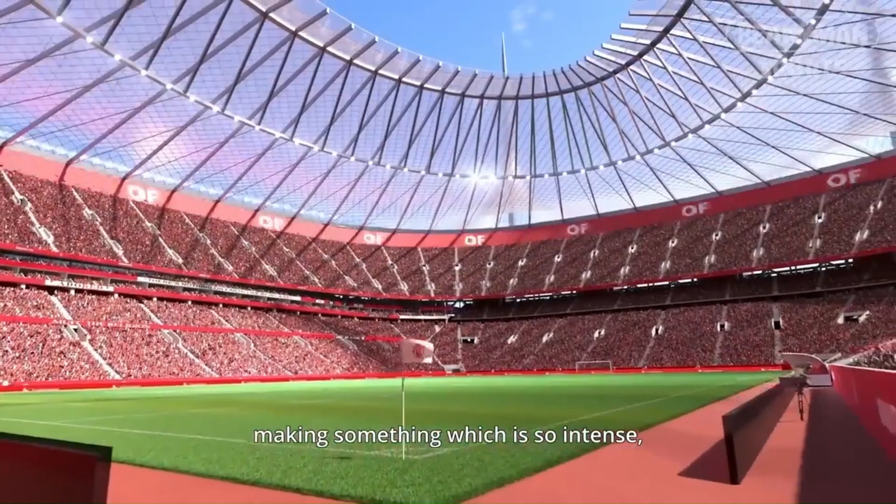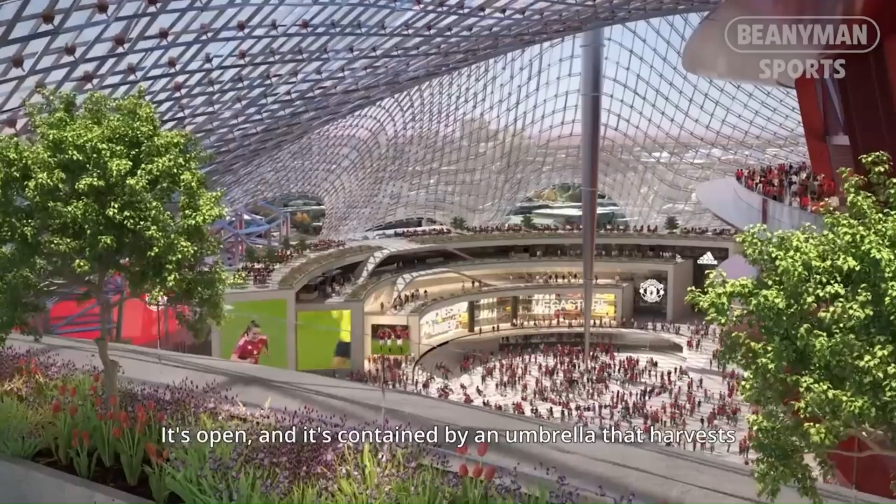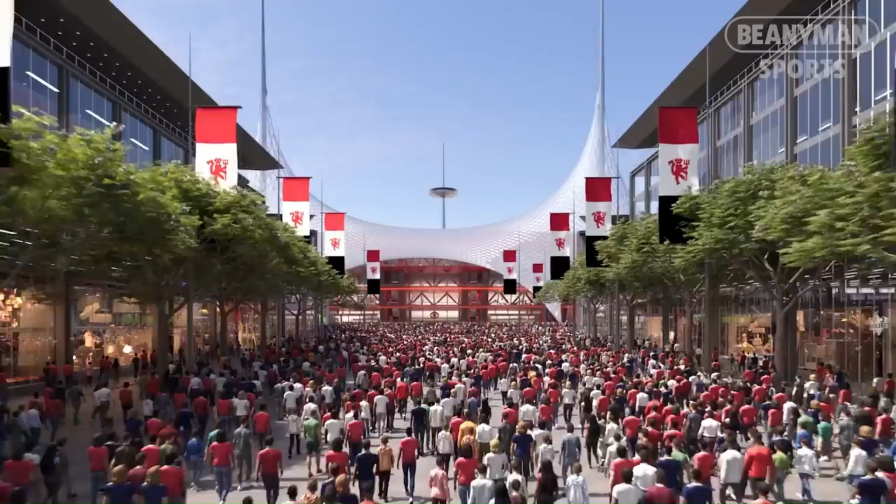This has to be one of the most exciting projects in the world today. It starts with the most famous football club in the world, 1 billion followers globally. So it starts with the fans. And it starts with the idea of making something which is so intense, it brings you close to the pitch. Acoustically, it cultivates the roar. As you move away from the stadium, it's not a fortress surrounded by a sea of cars. It's open, and it's contained by an umbrella that harvests solar energy, harvests rainwater, but is protective, and it encloses arguably the largest public space in the world. It's welcoming, it's open, it's at the very heart of a new neighborhood. And then it's part of the city of Manchester, the fastest growing city in the United Kingdom. A city, again, like no other. It's a powerhouse, steeped in history. Trafford Park was the industrial heartland of the nation, a heritage which I have a personal connection to. My father was a factory worker at Metropolitan Vickers.

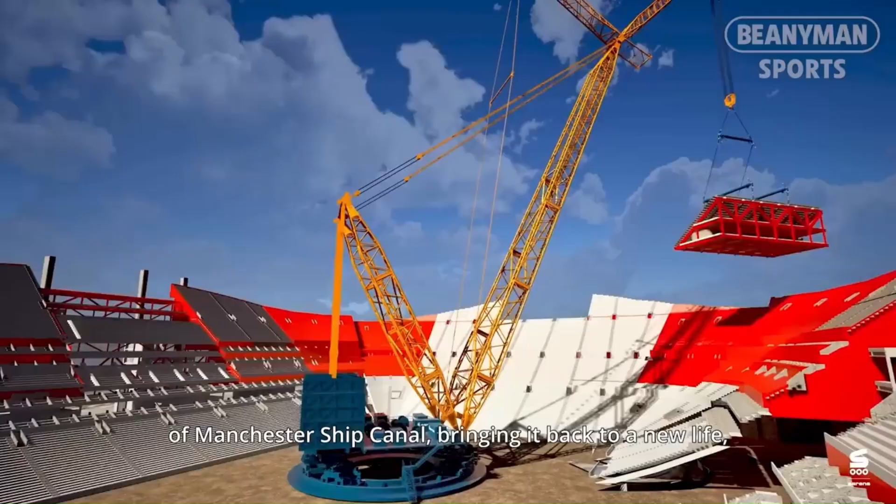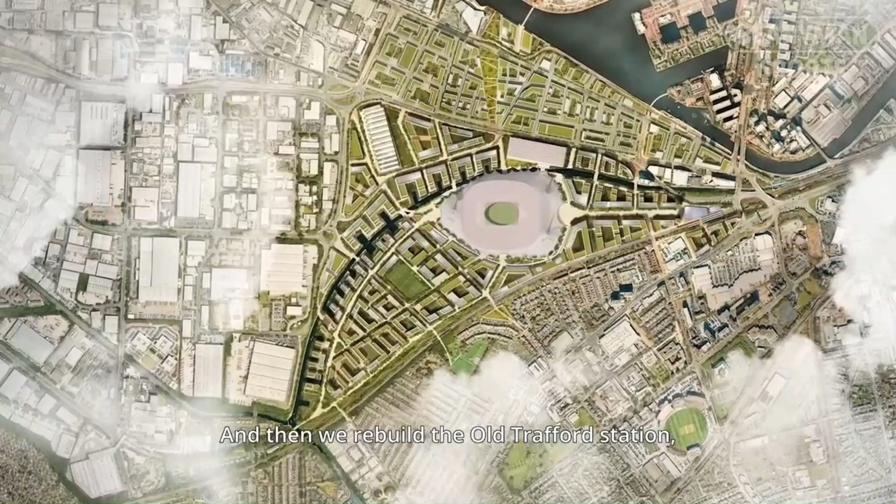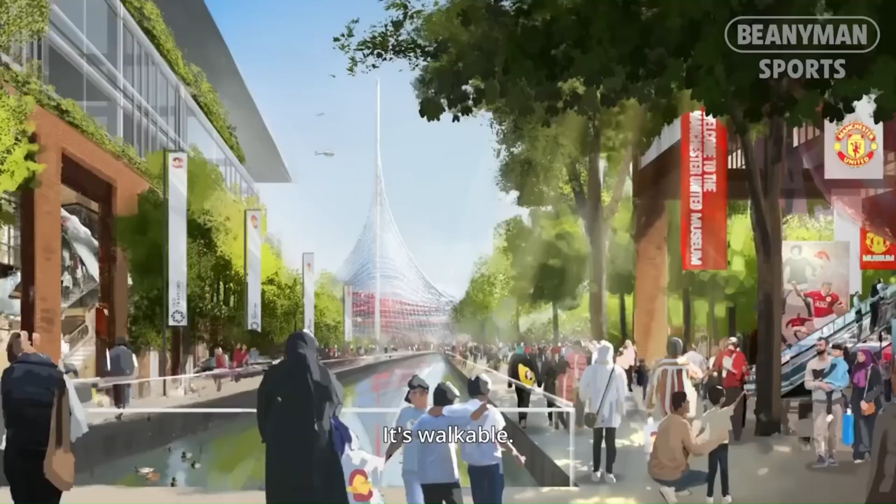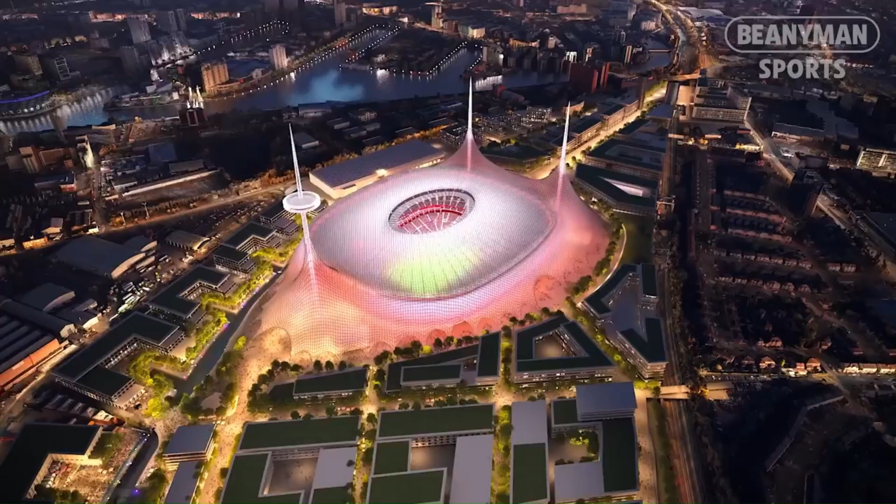And then the 3 masts, the Trident, visible from 40 kilometers, 200 meters high. So this becomes a global destination. Normally a stadium would take 10 years to build. We halve that time, 5 years. How do we do that? By prefabrication, by using the network of Manchester Ship Canal, bringing it back to a new life, shipping in components, 160 of them, Meccano-like, and then we rebuild the Old Trafford station, and that becomes the pivot, the processional way to the stadium, welcoming and at the heart of a new sports-led neighborhood. It's walkable, it's well served by public transport, it's endowed by nature, it learns from the past, it creates streets, it's a mixed-use mini-city. So what makes a global destination? What makes something so special? It's teamwork. It's the best brains, the civic leaders, the owners, the consultants, the engineers, the architects, the fans. The list is so long. It's a team effort. That is at the heart of the success of this project.

But what he said at the end, he said it's all about teamwork. And so the question is, he listed those people, actually put the fans quite low down on the list, which is quite interesting. How do they participate? They are all going to participate in the design and making of that project. And it's interesting that as a very famous architect, he doesn't start off by so much talking about the design. The main thing is the participation of all players. And that I wanted that as an introductory statement.

So the question is, who will participate and how? What I'm going to do is to go to the slide, the next one after that.

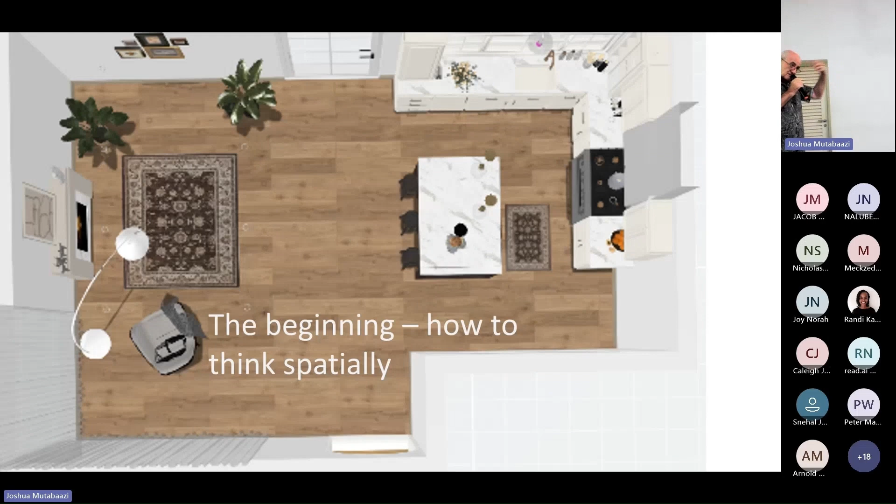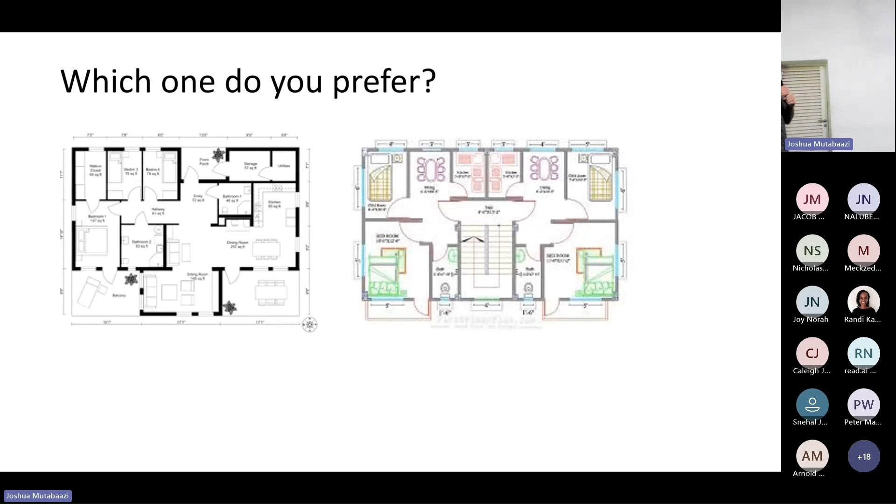This is a good example. What tends to happen is you have an exhibition and put plans on the wall and say, which one do you like? Do you like that one or this one? I've seen it so many times, people come up and say, oh, I like the one on the right. Why do you like it? Because it's got colours on it. Do they ever understand it? No, they don't.

So we did a whole lot of work at that time on how to get people to actually design. There's this wonderful organisation called Planning for Real, which apparently still exists. It's basically going back to that thing I said at the beginning: once you get people around the table with a plan, and you say, okay, where do you think the games room should be, or where should the classroom be, you give them the shapes and they start moving them around. To start off with, they go, what's this? And after a time, when they start doing it, they really do it.

So many times in my experience as an architect, we did plans for towns, and we asked people to come and play this game. We discovered our view of the town was that you entered from here. After this, they turned around and said, no, the main entrance to the town is over there. So the very fundamental things about the design, which you have to understand, can only really be understood when you get the users inhabiting and taking part.

So these are examples of using shapes. Here they used to get school kids to build models from old cereal packets and draw things. You move the buildings around, right?

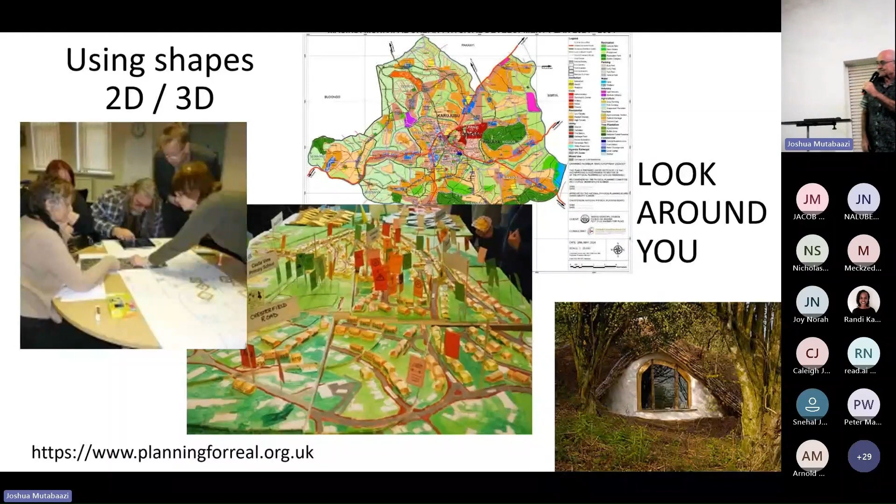When I was working in Ghana, when I came forward here, it was the same thing. So there's the map of the town, and that's the area flooded. It's a very dusty, dry town. It's expanding, just like the ones here, and there's a few houses here, here, and here.

So the game with the guys was, okay, every white square is like 200 houses. First, work out where you're going to put them, and all the shapes are there, like the road - where are you going to put the road? So you move the cardboard around, and there's an active discussion. They're actually designing that town.

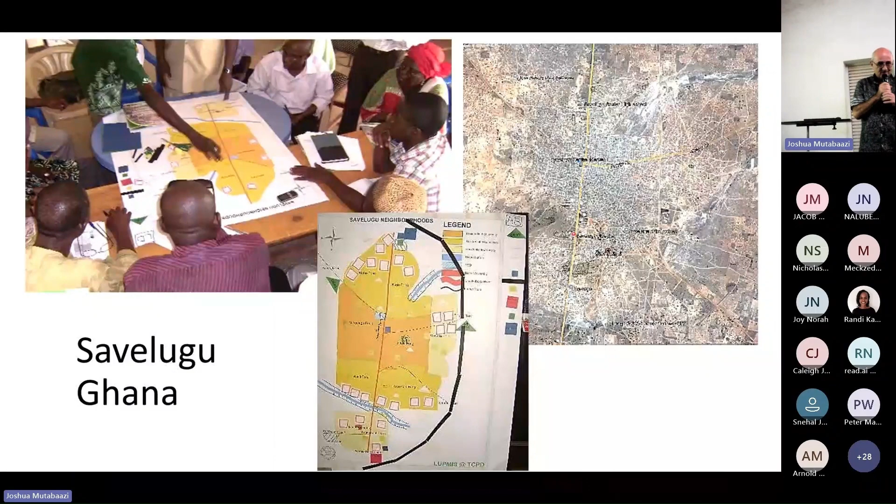The point there was that if you build all these houses scattered at the same time, you're never going to get services. You need to do them one at a time because they need to be concentrated in order to afford the services. There were about 5 chiefs who owned these quarters. They looked at each other, and one says to the other, okay, you go first, then I'll do my bit, then you do yours. They actually used the plan to organise how they would develop the town.

Now, another level. I was trying to think, how do you get people to express in their minds not just the organisation of space, but what this thing actually looks like? We were working with a lot of artists, with kids, on ideas and designs. So we got commissioned to do this.

There's a psychiatric hospital being built, and we worked with patients to come up with their view of how the design should be. We worked in the end mostly on this area here. In the original design that was just paving and drainage - basically the services area was not intended for any of the patients to go in there.

Long story short, we worked on it. The first point I want to make is that it was already starting to be built when we first came to it. I remember going to the site and saying to the site manager, can we see the drawings? There was a stack of drawings, like 60 or 70 in a pile. Have you got one which shows what it's going to be like? Well, no, not really - I've got the buildings here, the windows here, the roof, but not really.

So we built a model of the building so that people would know what it was going to be like - this was even as it was being constructed. One of the things that happened was we took the model to the consultants who were going to be using the building, and they had this discussion. This whole wing here was designed for geriatrics.

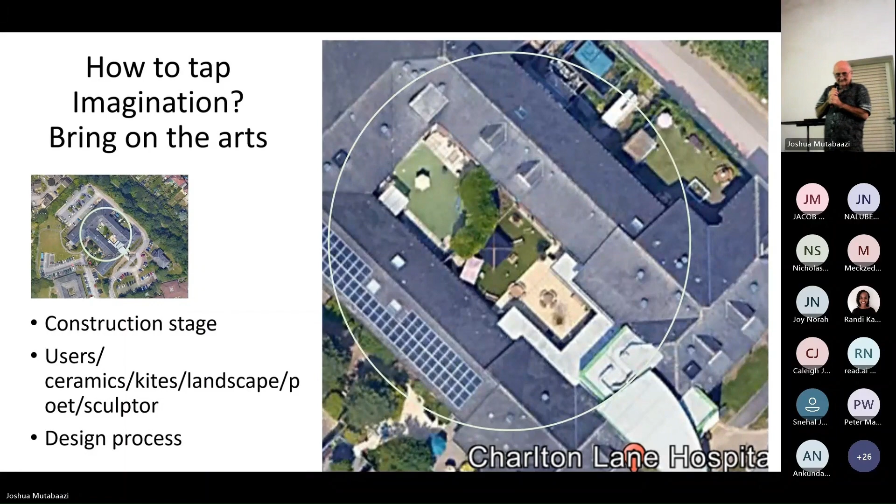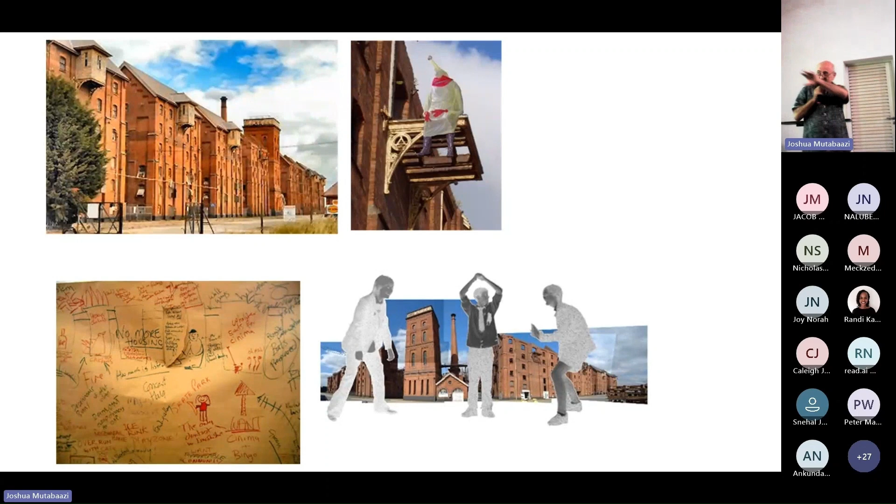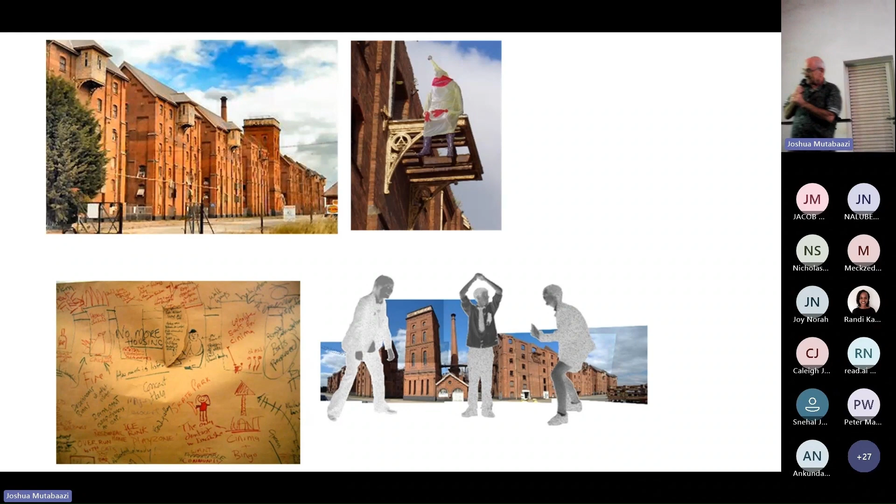Then the kids came in - next slide, this is an example - and they said things like skate park, cinema, bingo. It's not a very good slide. No more housing - in other words, we don't want any more expensive people coming into town and property prices going up, that's the housing we're talking about. Ice rink, and there was one about being overrun with cats. And then immediately your whole idea about this building shifts, and it did shift. Next one.

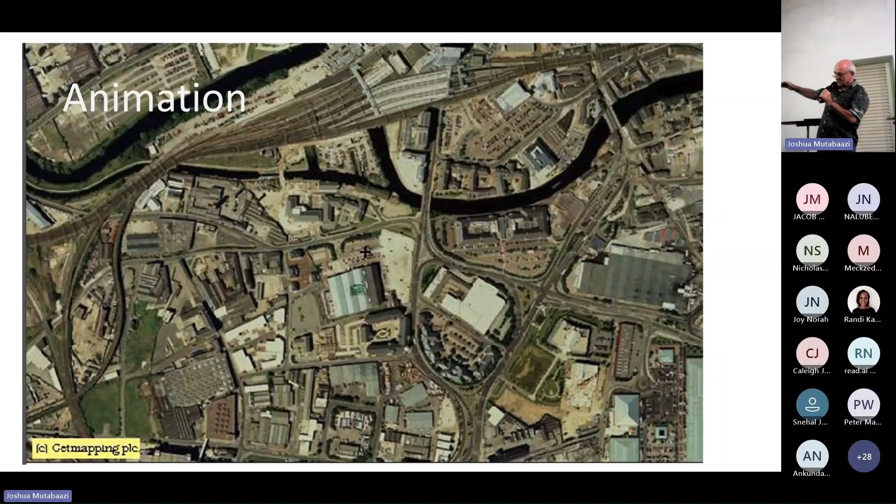So there was a big Asian community next door, which was kind of cut off, and the attitude was, no, you're not going to be part of this, because this is for the kind of other middle class professionals. But what we did was we created trails from the surrounding communities into this area, invited everybody into this derelict area, and did an event.

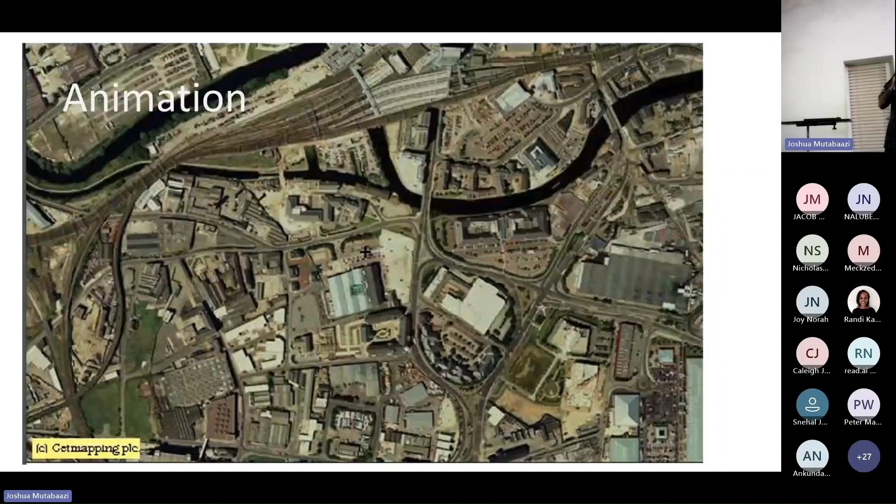Interestingly, the people who were funding it were the top brass at Yorkshire Forward, which was a development agency. They had an office on the edge of the area and they were funding it, but they had never walked around it. So we got everybody to walk around the area.

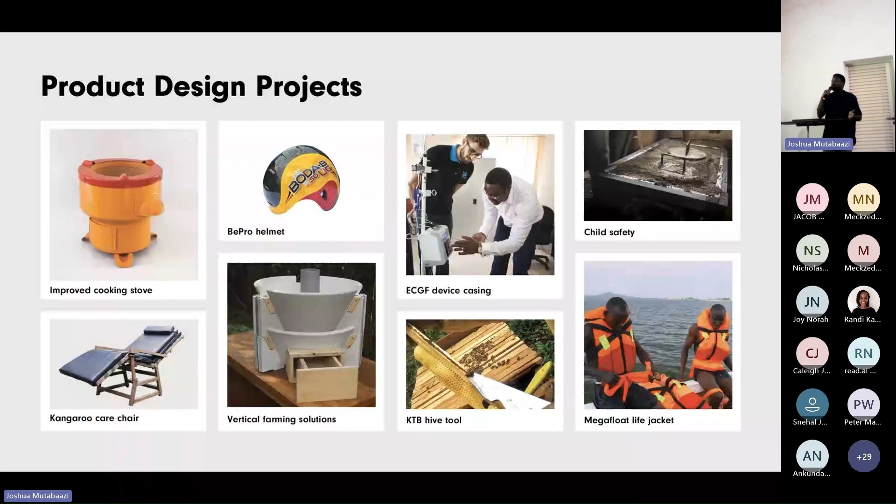And then there's the boda helmet, which you can also probably recognize, where we try to include some venting because of the tropical region we are in. So just to make it a bit more comfortable, as well as what you might notice or not notice, this small hole near the ear of the wearer. As you know, boda guys like to tell lots of stories, so we thought it should be possible for the passenger to communicate with the boda rider.

On the service design side, we have a couple as well. This particular one we did with MTN Uganda, trying to look at an application they developed, a service giving access to financial services, specifically loans, as well as the ability to make savings for people in rural areas. People in rural areas were not using the product, so they sent us in to try and find out how to improve the service for that.

But I think in most of the work that we do, and maybe also in many ways my personal journey, has been to try and redefine the role of the designer. And as we might all know, since the advent of participatory design methods, including design thinking, human-centered design, and user-centered design, there's been a move from instances where we see the designer as an expert, all the way to the designer being more as a teacher and as a facilitator. And very likely in the future, where we see the designer more as a mentor and advisor of a process that's already happening.

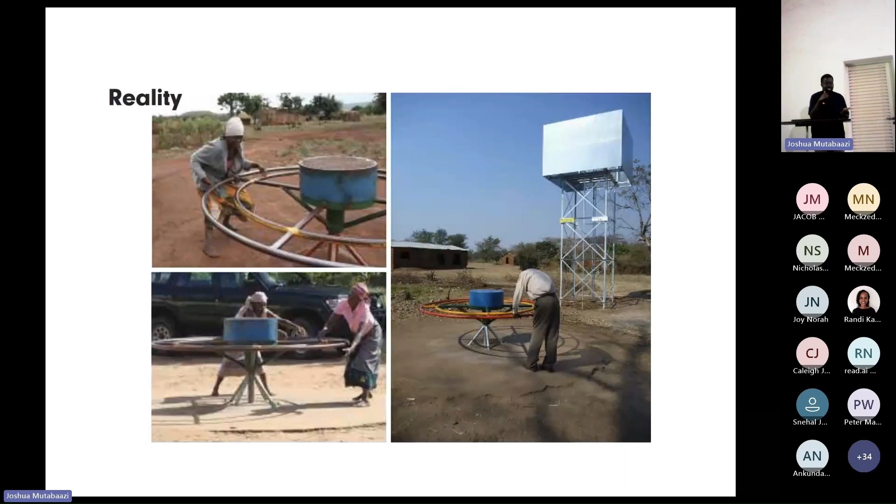And then the capacity wasn't really enough, so the tank was really never full. So you'd have instances where adults have to come and pump just enough to fill a 5-liter jerry can or a 20-liter jerry can, and then they're off to go about their own business.

Another one is very common. Mosquito nets are very often sent to the developing world, and the expectation is that you'll have children happily smiling under the mosquito net, feeling very safe from the mosquitoes, but then nobody expects that the same mosquito nets will be used to fish.

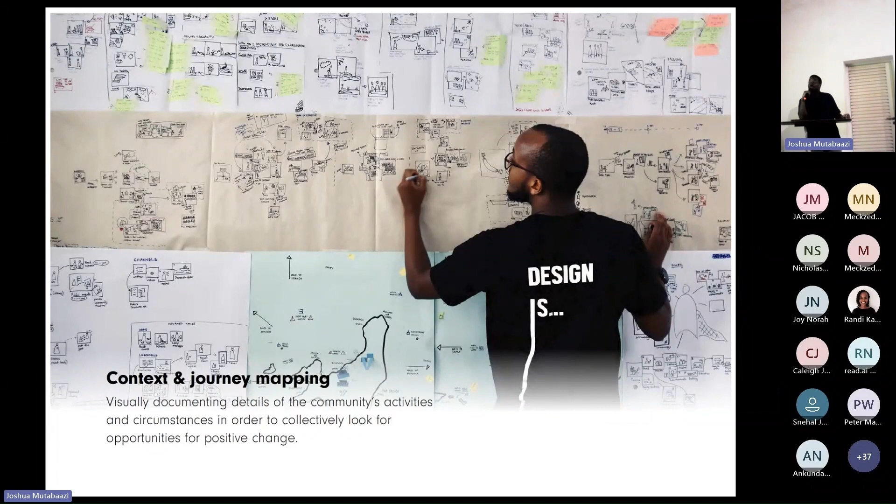Context mapping and journey mapping, one of our favorites, is where we often ask users what their daily experiences are like, and then take the effort to visualize each of those experiences in a way that allows them to let us know if we've missed something or detracted from the story they're telling. That's actually Dennis, so here we can verify he was part of that project. This is the same project in Tanzania.

It's best to get such information directly from the users. Co-creation with the community means working together to develop potential solutions, while being very intentional not to remain at the point of sticky notes and markers. You're actually producing prototypes of varying levels of fidelity - it could be low fidelity prototypes using paper or mock-ups, all the way up to higher fidelity where you're actually making a life jacket and taking it out into a community test.

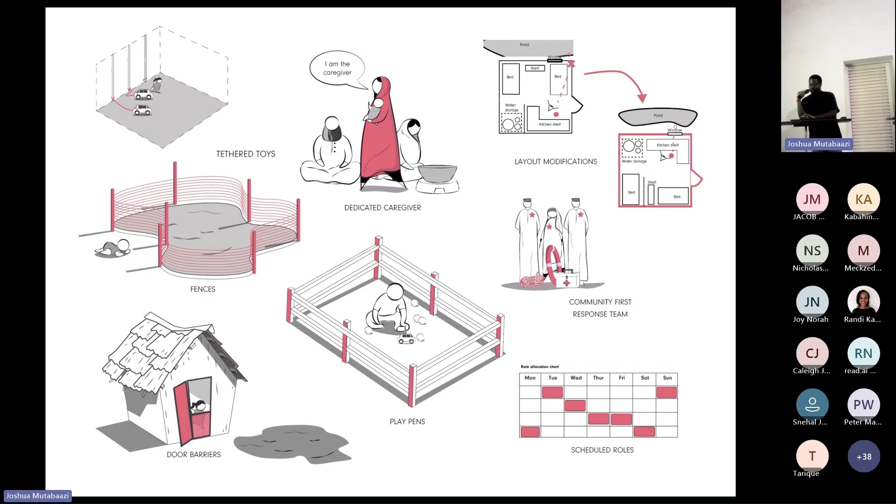Perhaps one more project, this one: we are looking at vertical gardens. Sorry, so just to complete this one, those are currently being designed, still happening. We're now in the conceptualization stage, after which we shall be getting into prototyping as well as testing. So for now that's really as far as I can show for this one.

With the vertical gardens project, this is interesting because it's a client we've been working with since 2019, and there's always iterations for what seems like a very simple project, just a vertical garden, right?

But then you also have worms, earthworms, that are inserted at the top of the garden so that they can travel within the garden every once in a while to fertilize the soil, but then also retreat to the compost chamber in the middle to feed, or to escape water. If the garden is very wet, they retreat to the chamber to get better conditions.

So there's a whole science around earthworms and how they behave that Paul decided to delve into, and then approached us to think about how to scale this project, to really think of how to define the design of the garden on a product design level. We started, of course, by speaking to users. Paul brought in some farmers. He was actually interested in urban farming, so he wanted to make this available for urban dwellers, low-income urban dwellers.

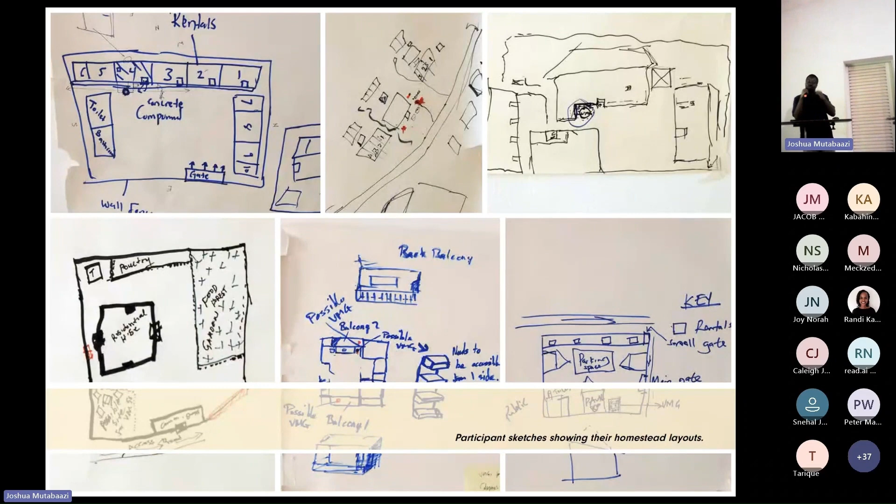I think the easiest one to see is probably the one in the top right corner. What's also clear from that placement is that the biggest challenge we faced was exposure to sunlight. So we tried to model different housing typologies to understand how much space is typically available to people living in apartments, which you can see here.

The upper one is what we often call rentals, which are all built on the ground with lots of units sharing a close compound. But then also, how about informal settlements? This is where we have all the informality, you have a playground, but also a grazing area for cattle.

You might even have different housing typologies within the informal settlement - maybe one family lives in this house, but in the next house it's an extended family. We created the concepts you can see down here, and invited the farmers and users to price each concept based purely on perception. We can see they thought this one would be the most expensive for the concrete garden.

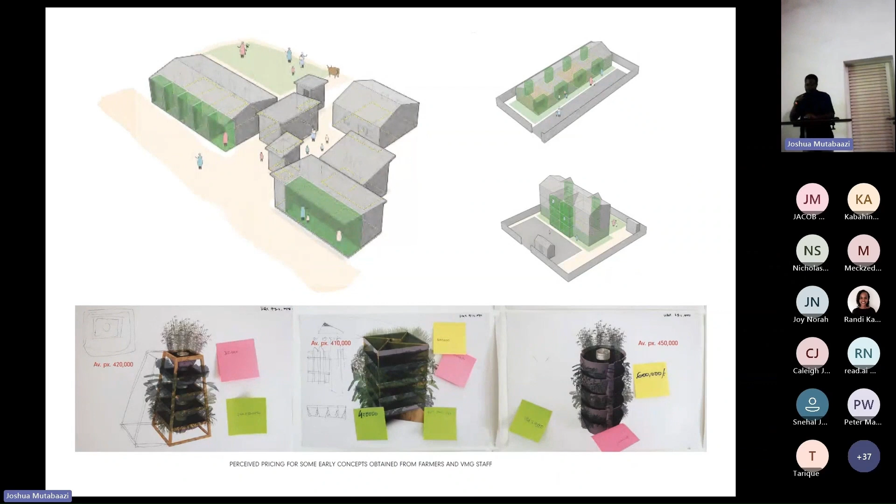So we went ahead and started prototyping. Paul noticed he might want to look into different prototypes - one low cost and another a bit higher up market. So we did the concrete version as well as the wooden frame version. It then happened that the concrete version actually scored cheaper in the long run than the wooden frame, mostly because it can be produced more efficiently.

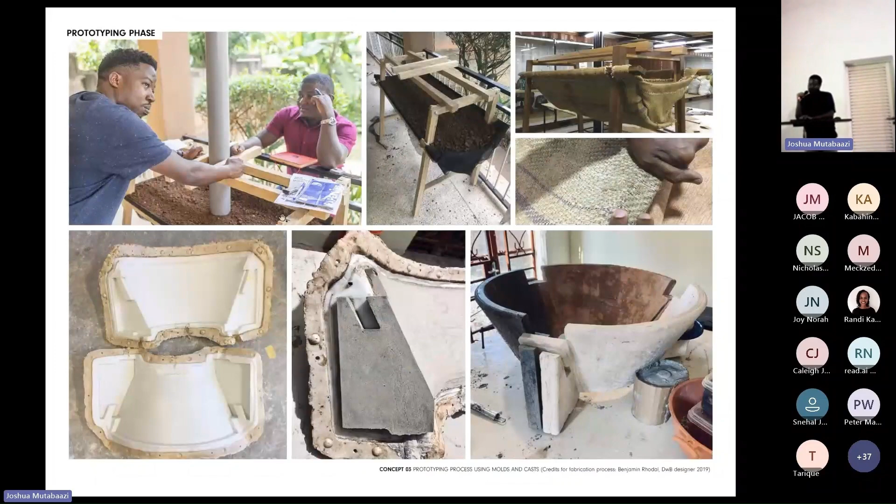He gave some very clear feedback about where to place the garden. Then that product evolved - he was approached by Save the Children to try and develop something for refugee settlements.

We were very fortunate to have our second design fellowship running, so we invited the fellows to carry out this project. They went into, I believe, two refugee settlements, one of the largest in northern Uganda, Rhino Camp, and came up with ideas that we thought we could take into prototyping.

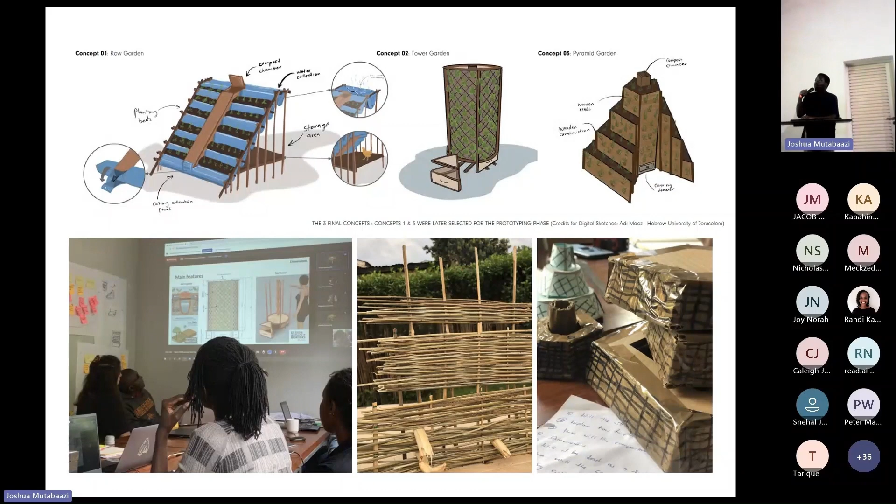Again, the farmers were involved to select which prototype they wanted to carry on with - sorry, not the farmers, the refugees in some of the settlements were involved, as well as their administrators, because the funding situation for objects like this can be really, really complex. We then took that into prototyping.

We built the one on the left and then invited carpenters to try and replicate it. We had a lot of challenges building the first one - there were lots of joints, and it was very difficult to use any glue since we were trying to avoid nails. We used some potato sacks to create this mock-up, but since it was really difficult to build, we thought let's see if carpenters can build it faster than we can.

So they built the one on the right, but it was really, really quite clear we were not going to implement this, because constructing 100 of these in the refugee camp was going to be a complete disaster due to how complex it was to set up.

Also, from our process, we started to notice that Paul would probably be able to make some money off this if he focused on supplying the compost chamber and letting the community build everything beyond that. That would allow us to take the price much lower.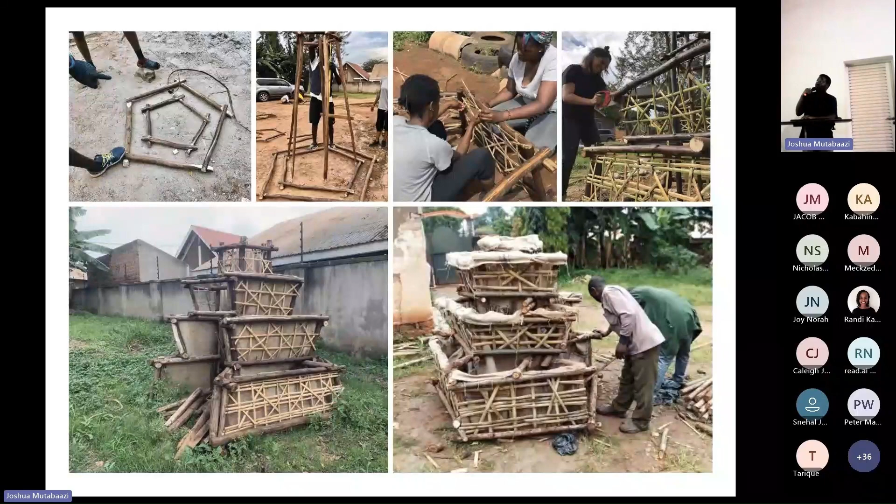So we focused on that strategy and tried to design something the community could construct very rapidly, while also trying to maintain some level of aesthetic, because that still matters even in settings like that—you want a beautiful farm in your compound. So this is what we started trying to think through.

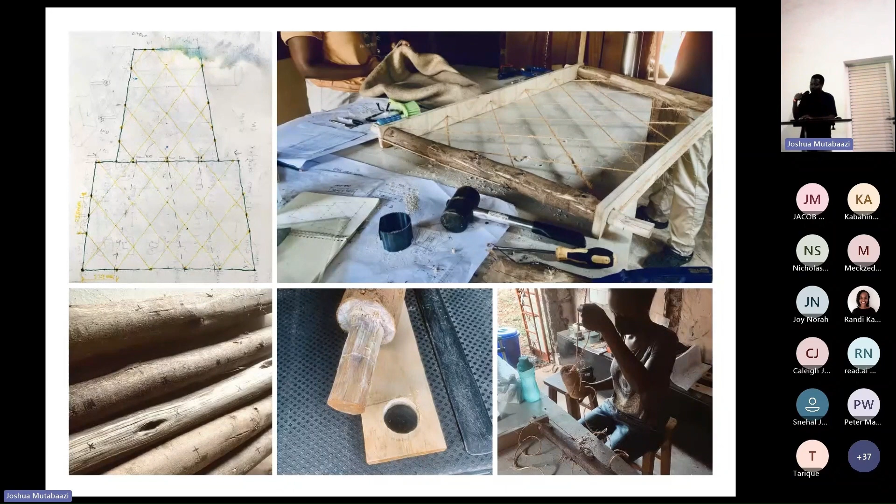We experimented with this kind of construction and developed a guide that whoever is not part of the design process could use to create the weave, mostly for structural purposes. There's a very particular way you have to pass the weave around if you're using one string continuously without cutting it—again, to make it easy to implement.

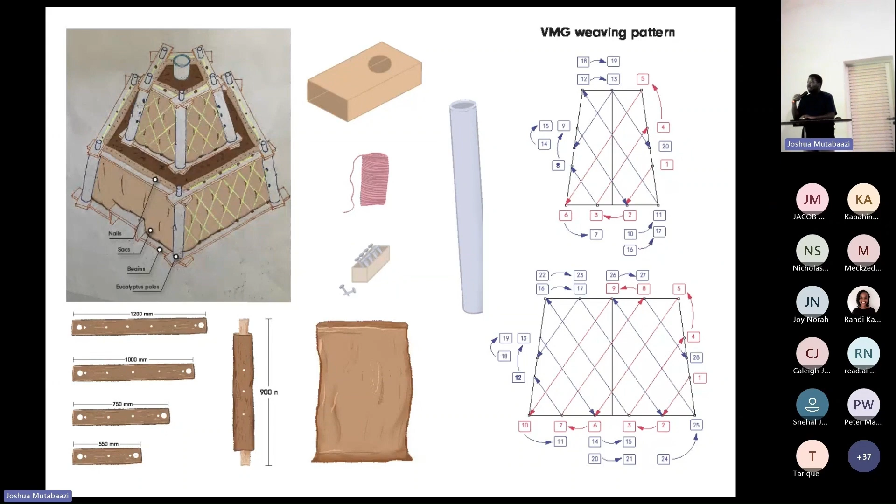We tested that out with the client team and it worked out fairly well, though there were things we had to address. Again, this was just a mock-up, but it was meant to lead us to the final product, which would resolve materials, durability, and all of that. Then Paul took it to the refugee camp to get the communities to try and construct it.

It wasn't the easiest experience. If you look at this image closely, the weave idea did not work in all cases, but in some cases it did work well. He also cut down costs in transportation—he was able to transport very many of those gardens in one truck, just enough for him to test the idea. Those were some of the results we got from the refugee settlements.

They said what they saw was an improvement in capacity—the number of plants they plant in one garden. They also said it was very efficient in terms of water use, because you're constantly absorbing the water that might sit on the lower part of the garden, pulling it up into the garden.

The worms were very alive and well, thankfully. They were quite comfortable with the general look and cost of things we need to improve, and that's the next step—addressing issues around durability, for instance, because that now plays very hard into the cost of the garden.

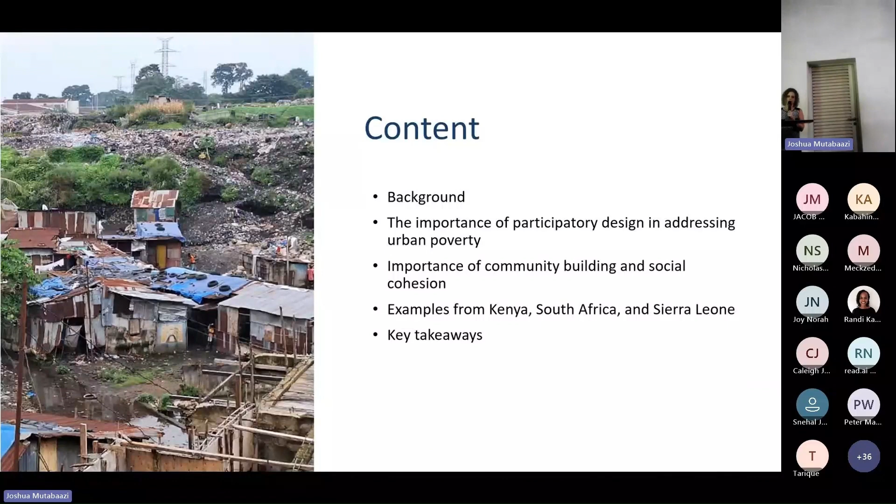Today I'll share a bit of the background of some of the work I've done, both with Cities Alliance and with SDI, which is Slum Dwellers International, and provide some examples from Kenya, South Africa, Sierra Leone, and then a few key takeaways.

For those who don't know, Cities Alliance is a global partnership looking to fight urban poverty and really looking at the role of cities, in particular secondary cities. We function through a multi-donor trust fund and are hosted by UNOPS, and that's how we implement our different activities at regional and national level.

A little bit about Cities Alliance: it was established 25 years ago, in 1999, during the launch of the Cities Without Slums Action Plan, in which Nelson Mandela was the patron. This was launched alongside the Millennium Development Goals with the goal to improve the lives of 100 million slum dwellers. This was the first time there was a sustainable development goal that focused specifically on the role of cities, particularly on slums and informal settlements.

As I mentioned, we're a network organization. These are different types of organizations we work with and through: national governments are part of our membership, local authorities - and the key thing to note is we don't work with individual local authorities, but associations of organized local authorities - through multilateral organizations like UN Habitat, UNCDF, the World Bank, and then civil society partners. Slum Dwellers International is one of those.

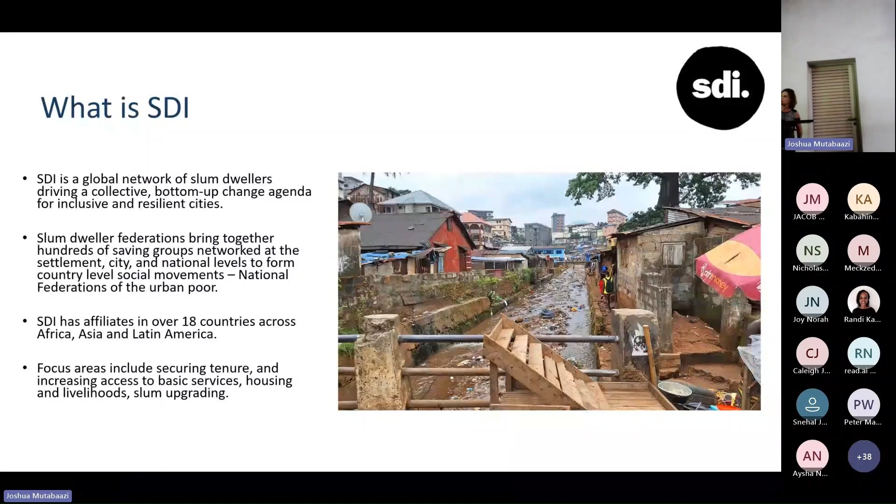So all the federations in different countries operate through a set of rituals or organizing capacities. The bedrock is around savings, and these are women-led savings, looking at the most vulnerable or excluded, trying to shift the power dynamics of saving money and access to money, making decisions based on resources at the household level with women, and understanding the larger good of the community.

Just an example, when you give money or savings to women, they will always first think about making sure the kids eat, having funds for education. Whereas, no offense, a lot of times we've seen with men is they'll just take their money and go drink it, not thinking about the larger community or household. So we're really trying to change those systematic barriers.

Another key thing is this community-led profiling, mapping, and enumeration. Most informal settlements aren't recognized, they're not included in city planning. People don't know the number of households or people there. A key first step is understanding what urban informality looks like. Key to this process is that it's done by slum dwellers themselves with support NGOs - they're trained in GPS collection and do house-to-house mapping. We've spent days going around settlements understanding the different boundaries.

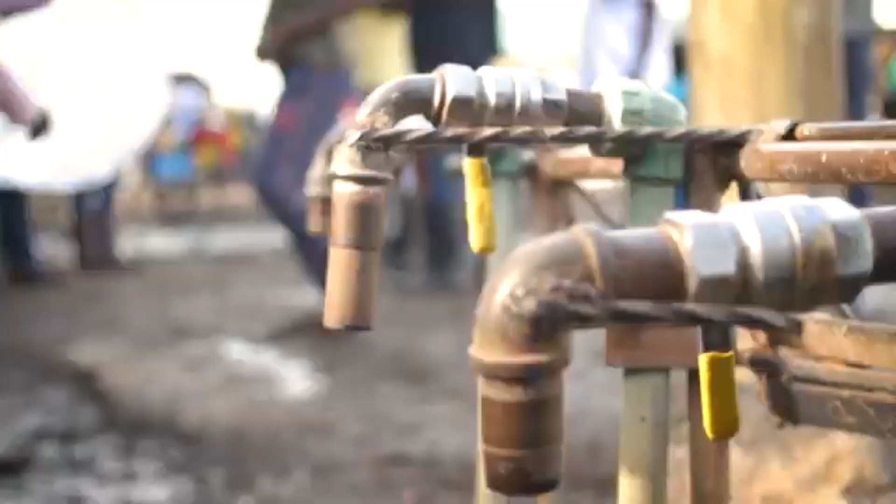My name is Patrick Njoroge, and I work for Akiba Mashinani Trust. I am a program officer, and I've been assisting in the Mukuru Special Planning Area in terms of community mobilization and organization.

The county government of Nairobi declared Mukuru a special planning area in August 2017. According to the Physical Planning Act 2012, the county government can designate an area as a special planning area if that area suffers unique development and environmental challenges. The county government is supposed to come up with an integrated development plan for the area within the next 2 years, so the plan should be ready by August 2019.

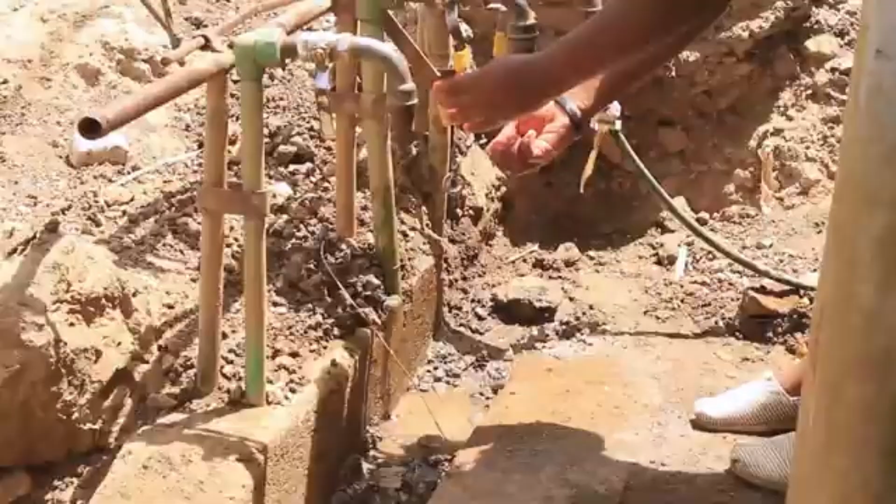The area declared a special planning area is divided into 3 settlements: Mukuru kwa Njenga, Mukuru kwa Reuben, and Mukuru Viwandani. All these settlements have about 30 villages, and 90% are tenants. With lack of proper tenure and proper planning, the area has suffered really complex challenges—we find they lack proper services like water, electricity, poor infrastructure, no roads, poor drainages.

Community mobilization has been a very detailed process. The 30 villages in Mukuru are clustered into 13 segments, where each segment has approximately 8,000 households. In each segment, we clustered the people into 100 households, which was used as a platform for people to discuss their issues. In the end, each segment will have 400 people representing them in each of the 5 consortiums. The total of Mukuru will have about 5,200 people.

And I think that really shows how detailed this participatory model is, and how it puts the community first in the planning process.

And this is just to say that they were able to get the declaration of Mukuru as an SPA because of the decades that they had worked there and understanding the local dynamics, doing data collection both at the larger community level, understanding how many households there were, and then doing literally household level data collection, understanding how many people live in each size house, what is the size of the house.

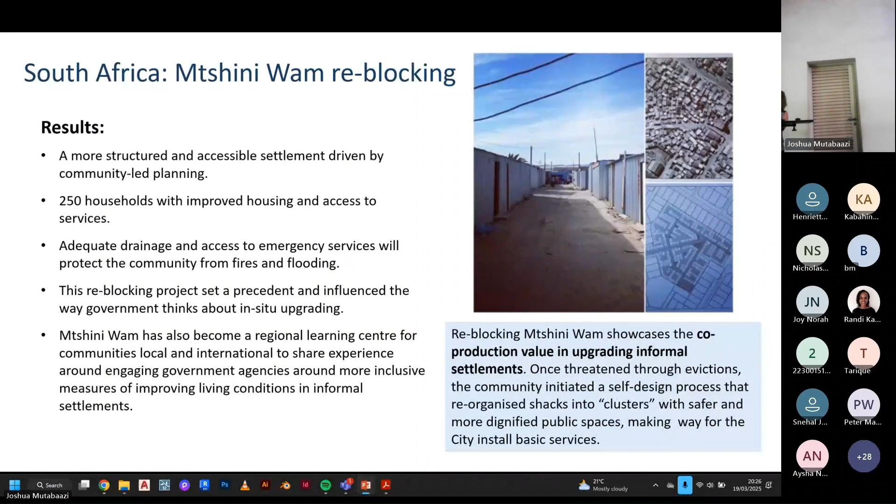So now jumping to the other side of the continent, talk about a project in Freetown, Sierra Leone: the Transforming the Lives program. This is a current program that's been underway for the past 3 to 4 years, but it's built on the last 10 years of community organizing and data collection that's taken place.

This is a collaboration that's now being driven by Freetown City. The mayor of Freetown is really a champion in the Cities Alliance in promoting...

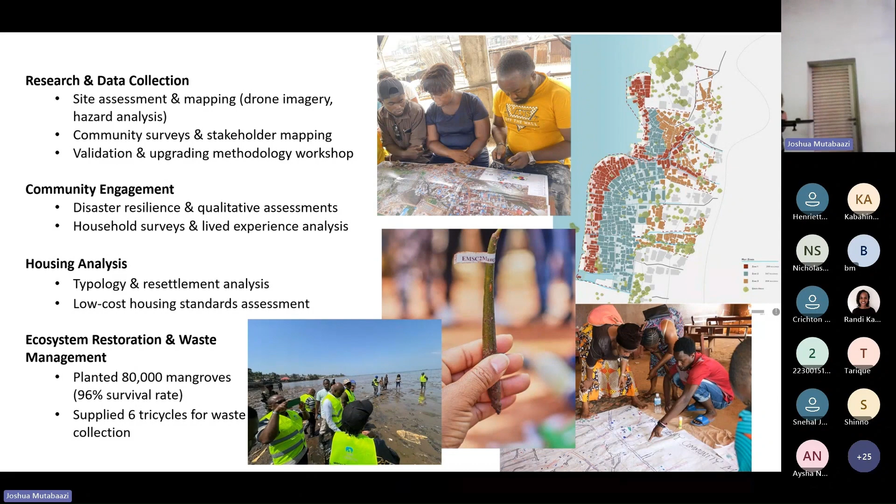So it's also a livelihood—they're getting a small stipend from the city government to reinvest. At the same time, they've developed different technologies for sustainable farming, like using a string to get the oysters to grow on instead of cutting the mangroves. So looking at it from a multifaceted approach.

This is to explain how they differentiated the different zones and classifications. Zone 1, shown in red right along the coastline, is the most high hazard, with no urban services, and that's probably where they'll most likely need to relocate. The city is working with them to look at what a step-by-step process could be. So this is some of the maps they've looked at.

This is one of the communities along the coast. You'll see this was all mangroves before—it's come back, these are plantings of them. And there's a lot of land banking and encroachment.

So in terms of housing, they've held community designs for housing, understanding what people need, and the economic and financial factors—what people actually pay for rent, how much they could afford—and that will influence the different types of housing.

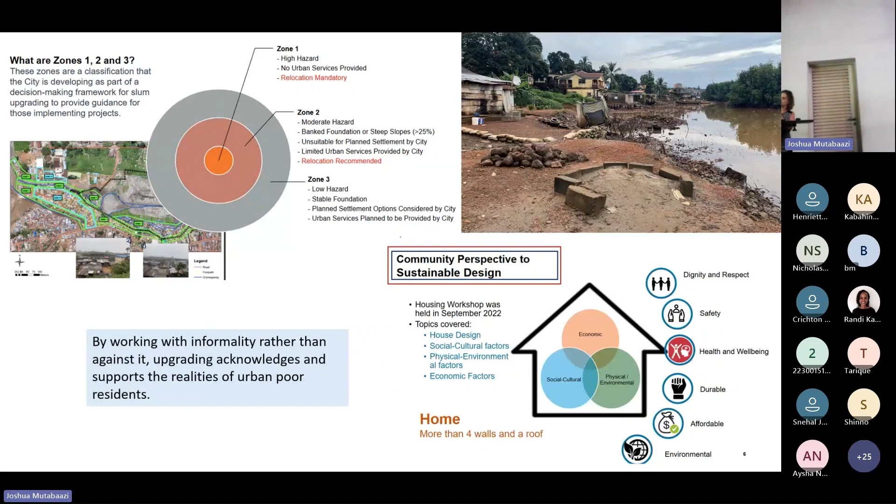So just from some of those examples, some key takeaways. These are both from Kenya - this is a local youth group of the Federation that did this mural, looking at how slums are just dumping pits and how they want to see it. There are a lot of local-led climate champions trying to do restoration and greening of the area.

And this is a local solid waste management, circular economy, recycling group. One of the things we've seen is that these strategies need an integrated approach - not just looking at housing, not just services, but bringing them all together, rooted in a local solution.

There's a slogan amongst all the federations saying that we are the problem and we are the solution. And no upgrading without us - they want to be the ones at the center saying, here's what we need, here's what we think we can do, and how we think this can be met. We've seen a lot of top-down approaches fail, so these initiatives are really the bedrock for scaling to citywide transformation.

And the use of really leveraging local knowledge - understanding and validating local knowledge as the basis really supports collaboration and co-design in these solutions. And then obviously the need for cross-sector collaboration. Both Cities Alliance and SDI work through partnerships and networks, understanding that no one can do it alone. It's too big of a problem. So thank you.